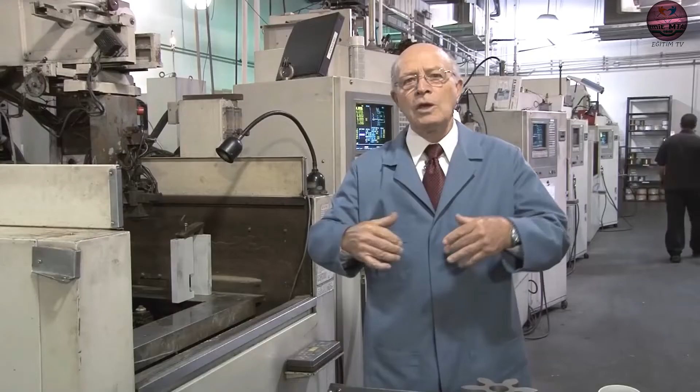Cut all kinds of shapes with Wire-EDM. This is a spool of wire that we use. It's brass, and you can envision this here, wire. It's like a precision bandsaw, and we can cut up to 45 degrees.

Anything that is electrically conductive, even tungsten carbide, Hastelloy, Inconel, all kinds of exotic metals - if it conducts electricity, we can cut it with wire. Wire comes in sizes up to 14 thousandths, but we generally go up to about 4 thousandths, with accuracies up to plus or minus one tenth of a thousandth.

An average hair thickness is 2.5 thousandths. If you can slice that hair 25 times, that's how close we can cut with Wire-EDM.

This is another Wire-EDM machine, and here you can see the wire coming in from the back of the machine. It goes up in these rollers, and it comes down into here, and then it goes through the diamond guide. And here's a part in the machine where we're cutting out the keyway.

There's a keyway in here that was already cut out. This machine, and most of our machines, have an automatic wire feed system. This will automatically cut the wire, and the wire goes back and gets chopped up, and then the machine moves over and automatically rethreads.

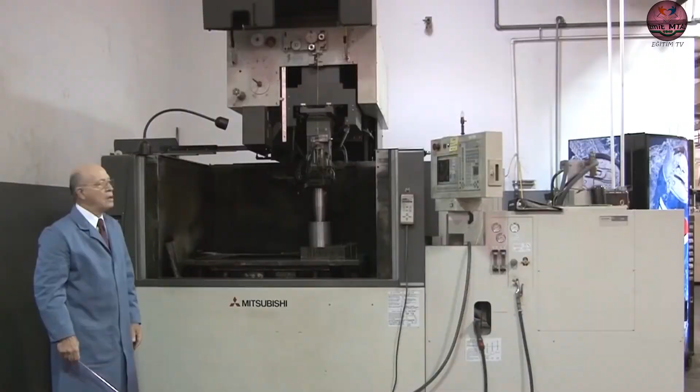This is another one of our EDM machines here, and this is one of our large ones, to give you an idea of the size of it. This machine can cut up to 26 inches submersed. From here to here, it's 26 inches deep, and it's filled with deionized water.

It's submersible. We have a part over here that's for the oil field, and we're cutting a taper in here - it's a circle on the bottom, with a little shape cut out over here, and this is the shaft. I'd like to talk about our showpiece that we have over here.

And this is an eagle, as you can see right over here, and here's Texas. This would be impossible to machine with conventional machining. Just look at the detail on this eagle and the arrows over here, and then the lettering here, reliable EDM. Notice the thin lines that we cut out - remember, Wire-EDM is like a precision bandsaw. Now look at Texas down over here, and there you see the R that we cut out - we left it on there. And then our website, it's all done with Wire-EDM.

I have in my hand a test specimen that we're going to put into this EDM machine to give you an example of how Wire-EDM cuts. You're going to see the sparking taking place. But there's a lot more to this - we're going to go into details in other videos, how Wire-EDM works, and also the amazing capabilities of this system.

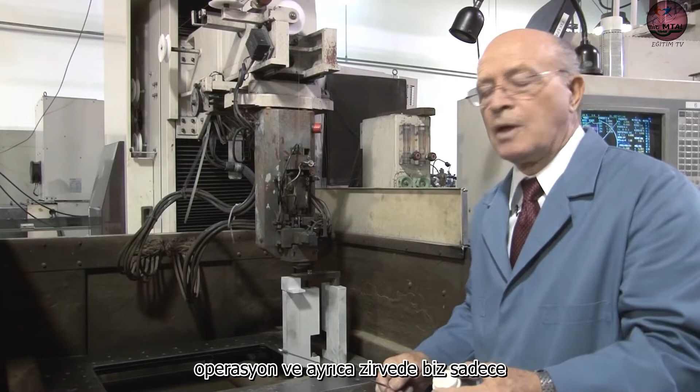Now we have the test piece mounted in the machine over here. But I want to stress, this is not the normal way we do our cutting. I have in my hand a flush cup. Usually what we want is the flush cup riding along the bottom - this makes it a much more efficient operation, and also on the top. We're just doing this so you can see the sparking taking place.

Now we're filling the tank with water. This is the deionized fluid. Later on we'll explain more about how this water works. The wire has to be surrounded by water for it to cut. The water acts like a resistor.

Now we see the spark erosion taking place, and it's cutting. Sparks jump from the wire to the workpiece, and there's always a gap. Later on we'll go into much more detail about what actually happens within that cavity. It is spark erosion - the sparks are eroding the metal particles, and then the filter system removes the eroded particles.

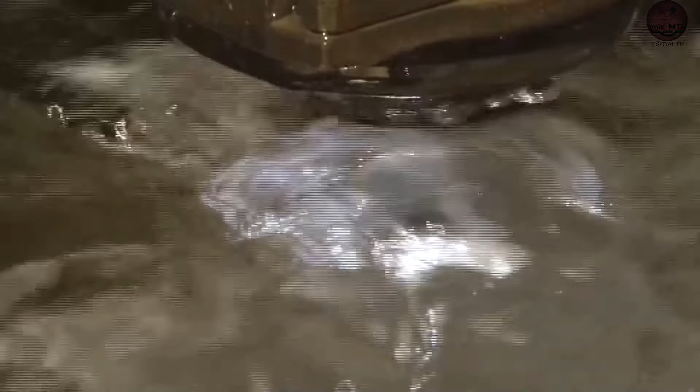Now I'm going to turn the flush on, and this is what we would normally have, but then you can't see the sparking so well. Look at the sparks now, it's cutting into that edge. There you can see the full length of that wire now cutting into that edge.

We just took this test piece out of the machine, and you saw the spark erosion taking place. Now I want you to look at this scene where we're going to be skim cutting this entire piece.

One of the questions is, with the wire, what happens to it? How many times do you use it? We only use the wire one time. At the back of the machine, we chop up the wire into tiny little pieces. We have these choppers that are in the back there, and then we sell it for scrap. This is not gold, this is just brass.

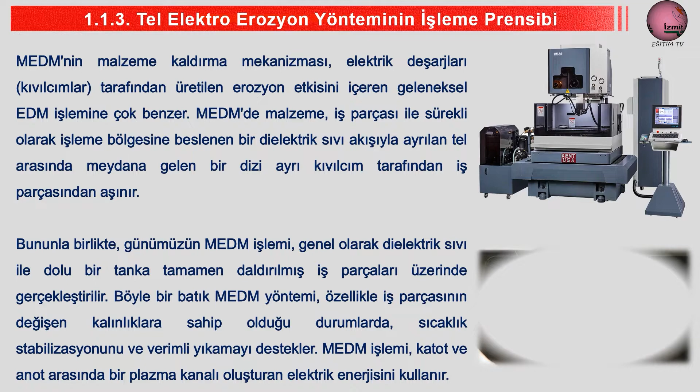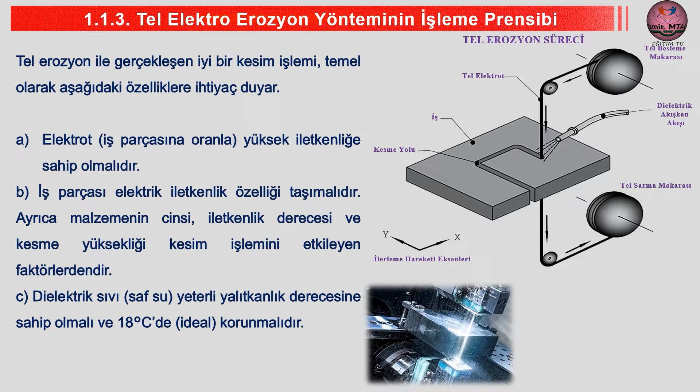C. Dielektrik sıvı yeterli yalıtkanlık derecesine sahip olmalı ve 18 derecede korunmalıdır. D. Ortam sıcaklığı 20 derece ve nem oranı %50 olmalıdır.

Tel Elektro Erozyon tezgâhlarının donanımı. Elektrotermal metal çıkarma işlemi olan tel elektrik deşarj işleme, havacılık, nükleer ve otomotiv endüstrilerinde, işlenmesi zor çeşitli elektriksel iletken malzemelerde hassas, karmaşık ve düzensiz şekilleri işlemek için yaygın olarak kullanılmaktadır.

Elektrotun sürekli hareket eden elektriksel olarak iletken bir tel olduğu geleneksel elektrik deşarj işleme işleminin özel bir şeklidir. Hatalı şekiller üretme eğilimini azaltmak için mekanik bir cihaz kullanılarak gergin tutulur.

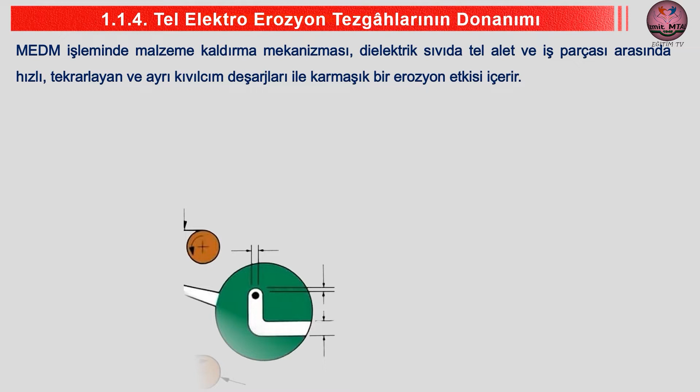İş parçası, dielektrik sıvı, tel çapı, makara, yarık, kıvılcım aralığı. Bu işlemde, malzeme telin önünde aşındığından ve takım ile iş parçası arasında herhangi bir nispi temas olmadığından, malzeme sertliği bu işlemle malzemelerin işlenmesi için sınırlayıcı bir faktör değildir ve ayrıca telde artık gerilme oluşumu da yoktur.

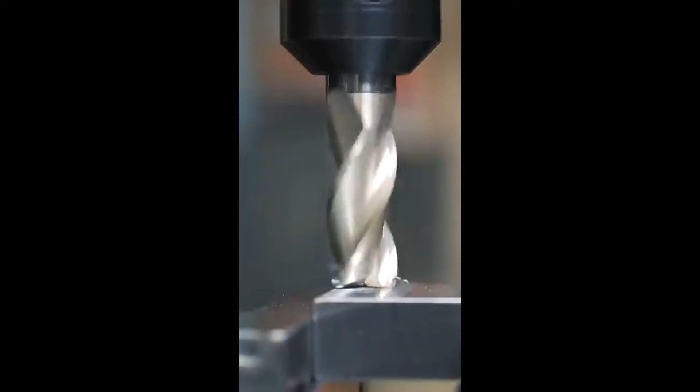Next, we use the mill to square it up and bring it to size. We hand file any sharp edges. Next, we take it to the grinding room.

A magnet holds the steel block on the table while the surface grinding machine is operating. A coolant is applied while grinding. Between grinds, we turn the magnet off and use the hose to wash away any steel particles.

We then use our hole popper to make pilot holes so we can thread the EDM wire. The coolant is deionized water. A brass electrode burns 4 holes for the 4 puzzle pieces and 2 as backup.

Next, we program the machine. Then we load the steel block into the EDM.

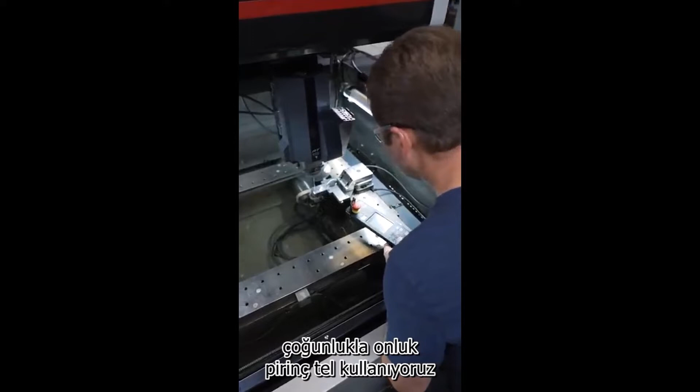We mostly use brass wire that's 10/1000ths of an inch thick. That's about 3 times the size of a human hair. For some projects, we use a wire that's 4/1000ths of an inch thick. The typical tolerance for a project like this is 1/10 of a thousandth of an inch.

We fill the tank with deionized water so the liquid has 0 electrical current. The water is safe to touch, which is why we can put our camera lens underwater. After threading the wire, it creates an electrical arc that burns away any conductive material.

The water flushes the material waste away, and the water is recycled. Despite this, the water gets very dirty within 5 minutes or so, we can't see much after that point.

After one piece comes out, we rethread the wire to cut the next piece, and so on. After about 2 hours of machining, the last piece comes out.

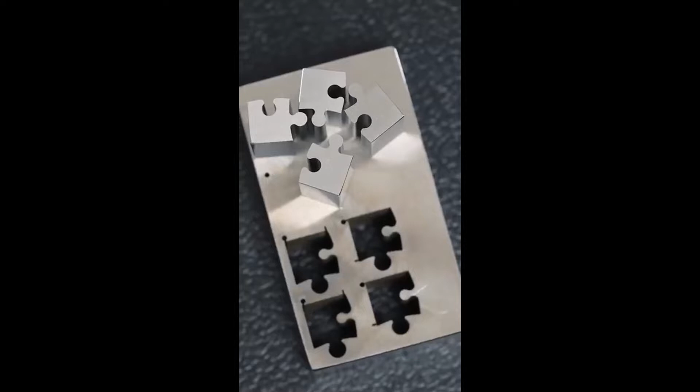We chop up the spent wire to be recycled. We put on the finishing touches using the manual surface grinder. We use this same process to make molds for parts we make in our plastic injection molding machines.

For example, we mold our E4T cover and it needs to be so precise that this lens can be installed perfectly.

Tel Elektro Erozyon yönteminin avantaj ve dezavantajları. İş parçasının sertliği önemli değildir. Titanyum, karbür alaşımları ve sertleştirilmiş çelikler gibi geleneksel yöntemlerle işlenemeyen malzemeler işlenebilir.

İşleme esnasında düşük kuvvetler oluşur. Mikron ölçüsünde hassas kesim yapılabilir. İnce malzemelerde herhangi bir deformasyon ortaya çıkmaz. Az miktarda çapak oluşur.

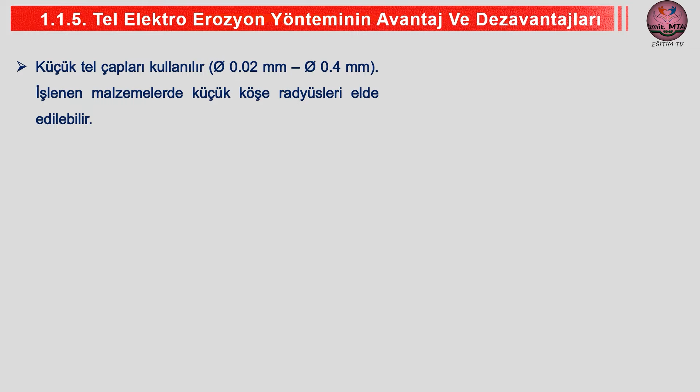Küçük tel çapları kullanılır. İşlenen malzemelerde küçük köşe radyüsleri elde edilebilir. Ortaya çıkan talaş ebatları 10 mikron civarında olduğundan talaş atımı problemi azdır. Dielektrik sıvısı olarak su kullanıldığından kıvılcım oluşumundan ortaya çıkabilecek yangın tehlikesi engellenir.

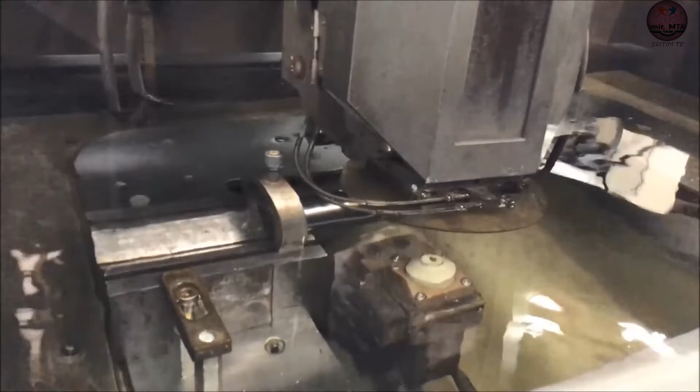Not going to start sparking it. You got to turn it on. No.

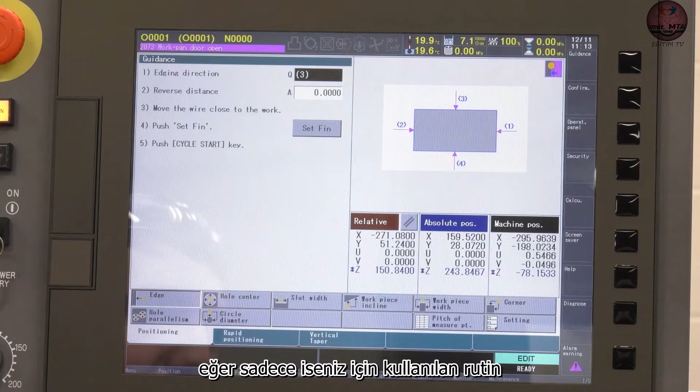With this screen, what have we got here? So this is a basic edge finding routine, used if you're just finding a single edge on the part. It's got edging direction, which way you want to go, and a reverse distance if you need that. It's all touch screen.

Rough positioning speed - that's how fast you rotate. That rough positioning is for more accurate holes when you've really got to tie up to microns. And then you've got the other option of rapid, which travels a lot faster when accuracy isn't quite as important.

Then the others: threading the wire, setting the finish and cycle start. So it's almost like a canned cycle there, it's talked through.

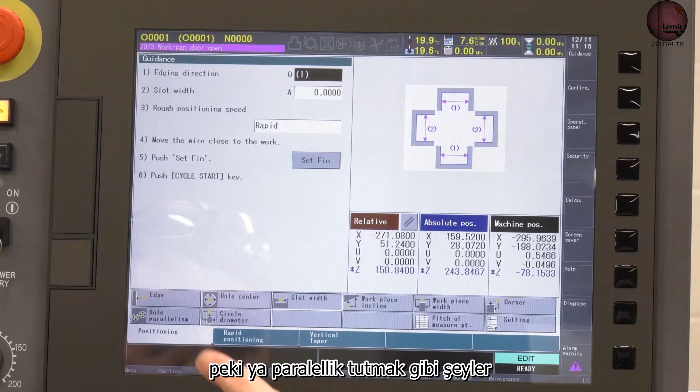Let's skip forward here. What about things like hole parallelism? That's for finding - if you've got 2 holes in a workpiece for alignment, you can find one, centre find on that, find the other, centre find on that, and use that to rotate the axes around.

And then circle diameter? If you've got to find the external of a circle, if you're working on the outside, use that.

And one of the things you mentioned to me is the graphical side of this, and how that assists you. Is there anything you can show us here? So this is the graphics for a program, just to cut out some soft jaws for one of the jobs we've got on milling. This displays the graphics there.

And what does that do? That fills you with confidence that what you've programmed is right? Yes, it does. It makes life a lot easier when you want to say, hang on, it's not doing what I want it to do. And it will tell you where in the program, with certain things, if it's wrong.

What about the diagnostic side of the machine, making sure that everything is working how it should? It's got a very user-friendly maintenance page which tells you the service life of all the items in there, and you've got your regular services, which covers all the other parts of the machine, like your die guides and other parts. Does this go beyond this as well?

It's got the filter life as well, so this is a very low hours machine. And you see consumable life and stuff like that. Do you use those features? Yes, we do. They're very useful and accurate with how long parts will last.

Okay, and then what's auto wire feed diagnose? That's telling us where, if we're having a wire break, where it's breaking, which is very useful if you're thinking - why is that useful? If you've got a wire break at a certain point in the program, it tells you if it's breaking on the material, if there's a hard spot on it, for example.

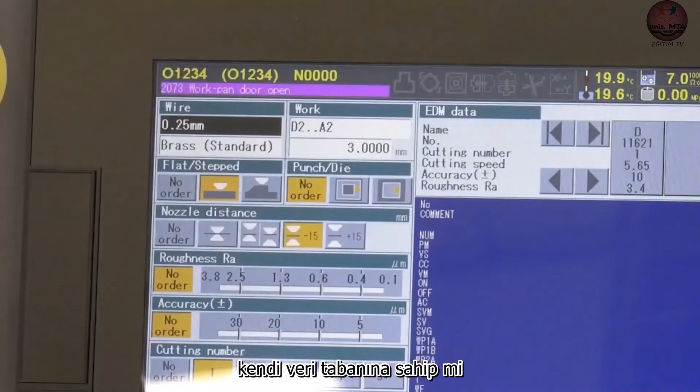Now I notice here at the top you've got wire, 0.25 and brass. Does it have its own database of materials and dimensions? Yeah, it does, it's got many options. This machine will cut from 0.1 to 0.3 wire. It tells it whether you're using hard or soft brass, and it works out all the feeds and speeds, the appropriate machining or cutting data.

Yes, it does. So taking all this into account, I know we've had a very quick demonstration, but how easy has all this been to pick up? How much easier does it make your life here when you're programming and operating these machines? And how reassured are you, as a result, that you're not going to make mistakes?

Oh, I find it very easy, and it's been very easy to pick up. Coming into wire EDM from a milling background, it's helped a lot when you're not quite sure of exactly what you're doing when you're first starting.

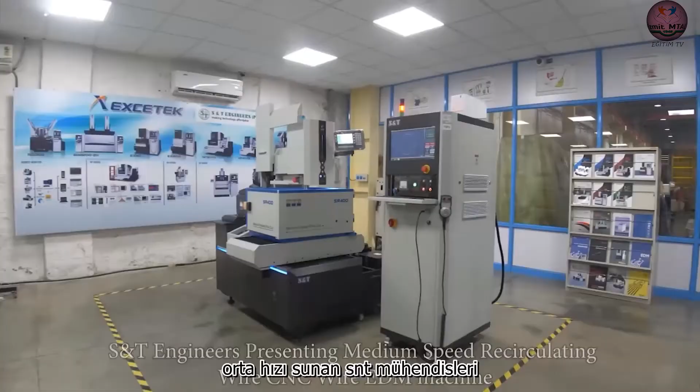S&T Engineers presenting a medium-speed recirculating wire CNC wire EDM machine.

Electrifying change is hitting the EDM market thanks to the new Mitsubishi MV Series wire EDM machines. With game-changing, all-encompassing engineering improvements, many of which are industry firsts, these machines deliver productivity and performance like never before. At Mitsubishi, we are always looking to improve, always finding within ourselves ways to compare and make things better than our previous generation. So with the new MV series, we looked at items from the previous generation to see what we could improve for our customers.

The machine construction itself offers significant improvements. On the MV series, with the T-casting, you have both the X and Y axes mounted directly to a set of ways on that base casting. The table moves right and left on that set of ways, while the column moves in and out on the Y-axis on a separate set of ways. This style of direct axis mounting removes the squareness and repeatability issues that come with a stacked table design, providing higher rigidity and smoother movement for more reliable and precise cutting.

The MV1200 machines are also twice as heavy as previous models, and offer a hardened stainless steel table and larger travel size without a significant increase in machine footprint, for larger submerged cutting capabilities.

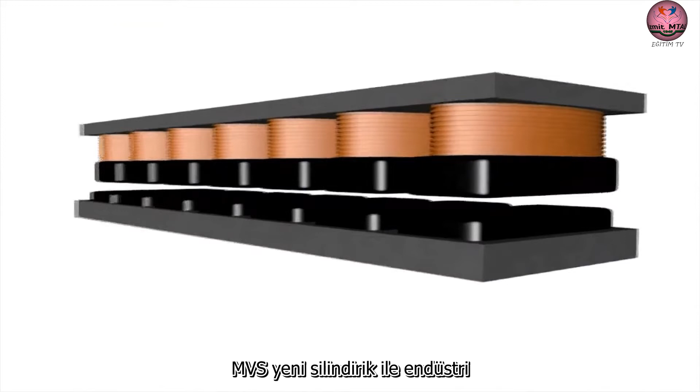Mitsubishi EDM revolutionizes the industry with the MV's new cylindrical drive technology. The round magnetic shaft of the linear shaft motor creates a 360-degree magnetic flux for a revolutionary no-contact design.

One of the negatives on a flat plate system is the magnets are rather large. It takes special construction in the machine casting to mount this. With a linear shaft design, we've taken those permanent magnets and turned them into little buttons, lined up end to end inside a stainless steel tube. So now we've got a shaft that basically replaces the ball screw, and when you put energy through it, it pulls itself along from magnetic field to magnetic field.

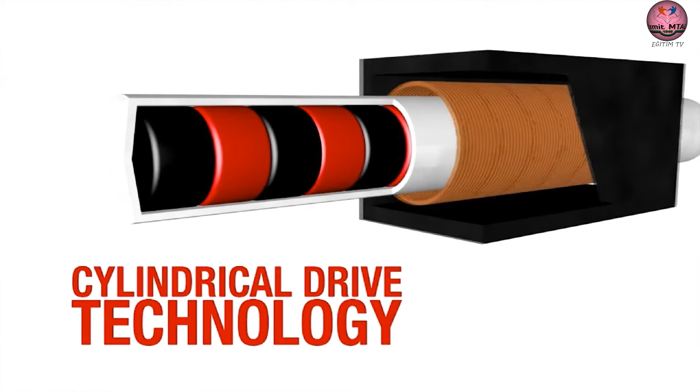The new design prevents issues associated with traditional linear drive systems, which trap heat behind the iron back plate on the magnetic mount and are susceptible to metallic shop dust interference. Other advantages of the cylindrical drive motor include higher speed precision, no lubrication or adjustment, simple setup, reduced noise, no cogging, and the ability to use commercially available servo drivers. By eliminating ball screws, we eliminate wear, backlash, and pitch error compensation, and thus the need for eventual replacement and the downtime it creates.

The new MV servo control system uses a fiber optic optical drive system with 4 times the communication speed for improved reaction time and accuracy. The Advanced Plus uses an optical drive system, so instead of hard wires running through everything, it's all running on fiber optics.

The digital matrix sensor and V350 Type 5 generator specifically shapes the pulse to minimize electrode wear and decrease wire vibration. With the digitally shaped spark and the speed of the control, they've been able to reduce electrode wear on the wire, allowing the wire speed to be slowed down. We've seen as much as a 60% reduction in electrode wear, meaning a 60% reduction in wire cost to cut a part, with no degradation in part accuracy or surface finish.

This, combined with a substantial decrease in power consumption, can lead to a more than 40% reduction in overall operating costs. A new auto threader design delivers improved threading capabilities.

Upper rollers now travel with the Z-axis, creating a constant distance to the upper guide. This allows for nearly 14 inches of annealed wire length, reducing the wire curl ratio to 10% or less, improving threading reliability on tall parts. The insertion method can be set to match the workpiece shape, and operators can now thread without the jet stream on, to get closer to the workpiece or machine smaller parts.

Finally, a new head design features a flat plate power feeder, making it easier to index during operations. Without the need to open doors or rotate the carbide or rethread wire, shops can realize significant time savings. On the previous version machine, it would probably take about 10 minutes to index power feeders. Here you can do it in about a minute per head.

The MV series is not just a linear machine, it also provides lower operating costs, reduction in cycle times, and up to a 30% finer finish than previous models.

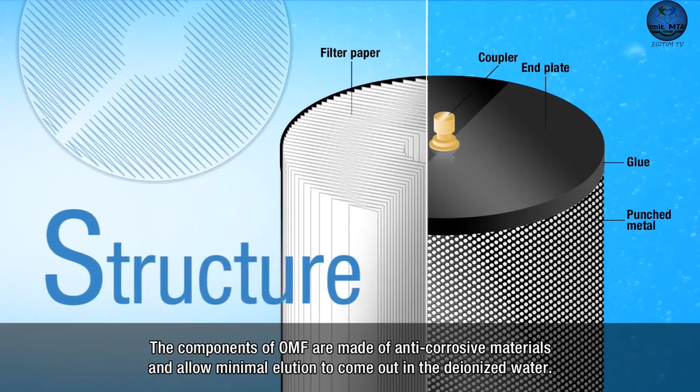Optimum internal filter design.

The OMF series has two distinguishing features. The first is ultra-high efficiency. Thanks to the OMF series' special fine filter paper, you can get clean water immediately after starting processing.

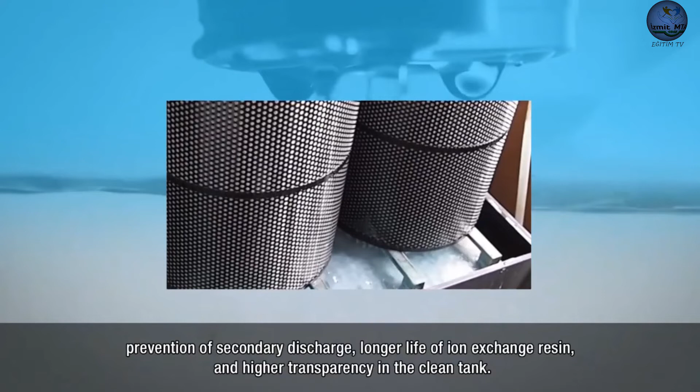Furthermore, in wire electrical discharge machining operations, OMF's ultra-high efficiency provides improved surface roughness of fabricating materials, prevention of secondary discharge, longer life of ion exchange resin, and higher transparency in the clean tank.

As you can see, with other conventional filters with coarse mesh, metal chips easily choke the filter and flow outside of it. But the OMF series is made of a special fine filter paper, which catches metal chips on the surface of the filter, making it hard for metal chips to enter inside the paper and cause blockage or clogging.

When you compare the used filter papers of the OMF with conventional products, it's plain to see how much cleaner the OMF series is. Since you can always get a clean filtrate, highly accurate electrical discharge machining is possible.

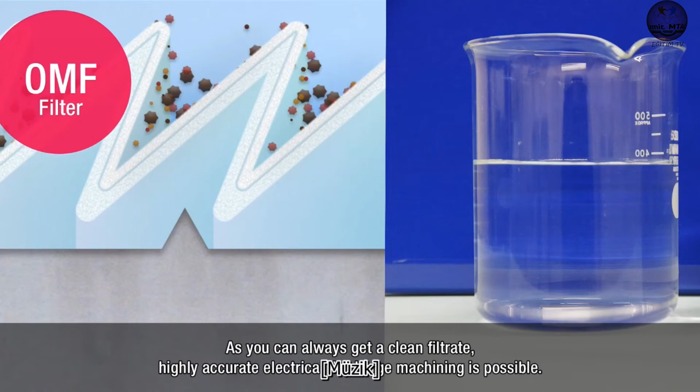The second feature of the OMF series is longer life. The OMF series has longer life due to a unique pleating structure and surface filtration mechanism that brings clean water for wire electrical discharge machining. This means that by using the OMF series, running cost can be reduced.

Our test results show the OMF has about a 30% longer life compared with conventional filters. The OMF series comes in a wide variety of filter types, providing suitable filtering solutions for various wire electrical discharge machines.

Tel Toplama Ünitesi. Makinenin bu kısmında kesim yapmış olan hurda tel malzeme otomatik çekici vasıtası ile toplanır. Tel Erozyon makinelerinde tel malzeme kesim esnasında deformasyona uğrayıp özelliğini yitirir. Bu nedenle bir defa kullanıldıktan sonra hurda olarak toplanır.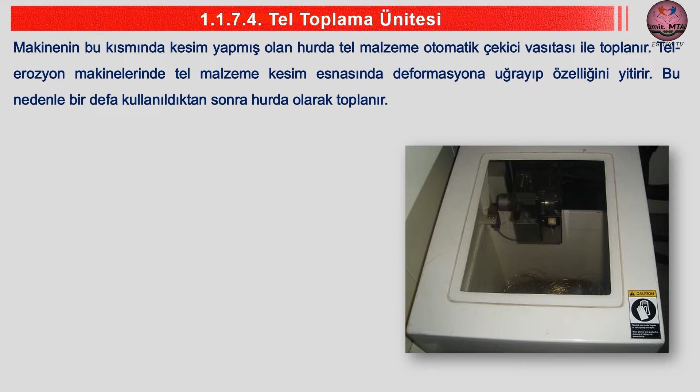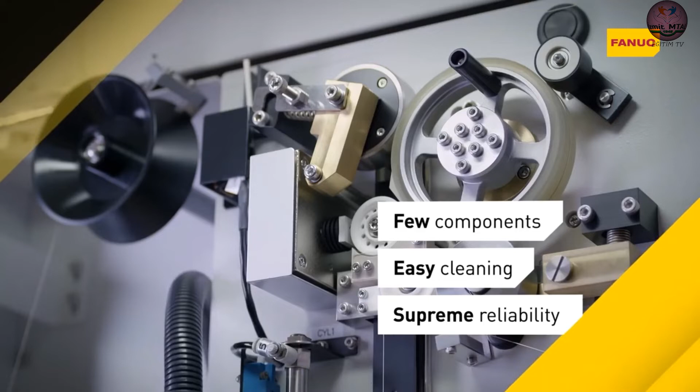For reduced cycle times and continuous unmanned production, RoboCut is equipped with cutting-edge wire feed technology. Fanuc's unique AWF2 automatic wire feed technology provides fast, reliable automatic wire feed in just 10 seconds. Wires are cut electrically, leaving a pointed end that is absolutely straight and burr-free, even on soft wire. Aided by a jet of water, wire feeding is foolproof and very fast. For easy maintenance and maximum reliability, the feeding mechanism comprises minimal components.

Regülatör ünitesi ve hava filtresi. Kesim esnasında üzerinde bulunan basınç ayar valfi ile hava basıncını düzenleyerek hava basıncını kontrol altında tutar. Hava filtresi tozları tutarak soğutmanın istenen seviyelerde tutulmasına yardımcı olur.

Hidrolik güç ünitesi ve soğutucu ünite. Makine tabla ve kafa hareketlerinin tahrik edildiği kısımdır. Soğutma ünitesi sürekli dolaşım yapan hidrolik akışkanı soğutur.

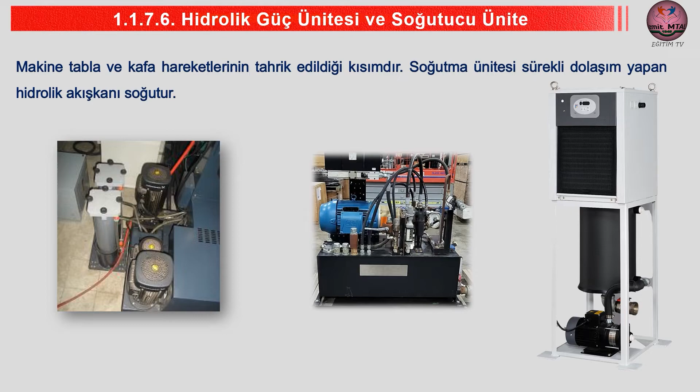Deşarj. Deşarj için gerekli durumlar. İş parçasının elektrik iletkenliği olmalıdır. Deşarj sıvı içinde oluşmalıdır. Deşarj ardışık olarak oluşturulmalıdır. Uygulanan voltaj, on-time, akım ve off-time kontrol edilmelidir. İş parçası ve elektrot arasındaki aralık kontrol edilmelidir.

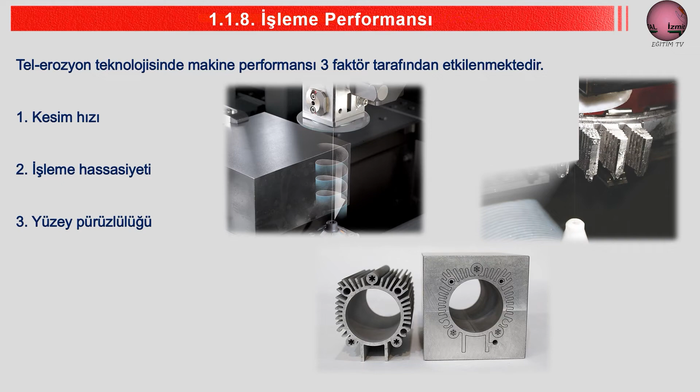Kesim hızı. Kesim hızı arttıkça kılavuzlardan başlayarak iş parçasının ortasına doğru artan bir şişme meydana gelmeye başlar. Çoklu kesim yapılsa dahi oluşan şişme engellenemez. Bunun sebepleri: tel, oluşan ilk şekle uyar. Ark, teli malzemeden itmeye çalışır. Bu nedenlerle yüksek kesim hızı ve kesim hassasiyetini aynı anda elde etmek mümkün değildir. Optimum kesim hızı hassasiyet ilişkisini tayin ederek en uygun değerleri seçiniz.

Kesim hızı limiti, yüksek kesim hızına ulaşmak için yüksek deşarj gücü tekrarlanmalıdır. Kesim hızı eşittir deşarj başına düşen akım çarpı tekrar miktarı, o da eşittir kesim akımı. Eğer yüksek kesim akımı verilirse kesim hızı artar. Ancak yüksek kesim akımı tel elektrodun ısınmasına neden olur ve bunun neticesinde telin çekme dayanımı azalır. Tel sürekli gerilim altında olduğundan ilerlemesi doğrusaldır. Isı neticesinde telin çekme dayanımı tel geriliminin altına düştüğünde tel kopar.

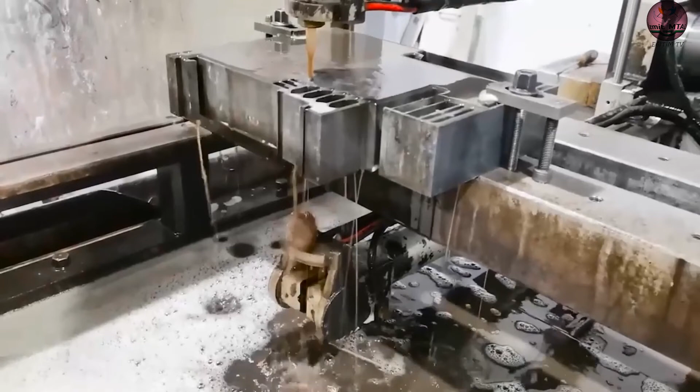Tel Elektrot. Üretimde kullanılan tellerin değişik türleri ve çeşitli üreticileri vardır. Tel Elektrot geleneksel işlemedeki kesici takım olarak düşünülebilir. Uygun kesim yapabilmek için uygun tel elektrot seçimi önemlidir. Deşarj esnasında iş parçasının yanı sıra tel elektrotta da aşınma oluşur ve tel çapı azalır. Tel sürekli akış halinde olduğundan çapı küçülmesine rağmen kopmadan ilerleyebilir.

Tel elektrot malzemesinde bulunması gereken özellikler şunlardır: Düşük elektrik dayanımına sahip olmalıdır. Kolay deşarj oluşturmalıdır. Yüksek sıcaklıkta yüksek çekme dayanımına sahip olmalıdır. Uygun bir fiyatı olmalıdır.

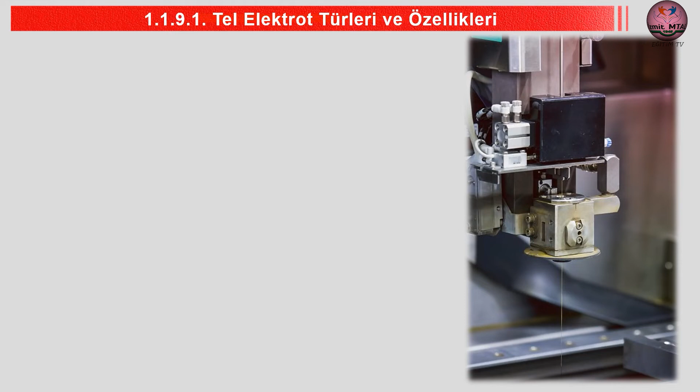Tel elektrot türleri ve özellikleri. Pirinç tel, %65 ile 70 bakır ve %35 ile 30 çinkodan yapılır. Deşarj performansı ve çekme dayanımı oldukça iyi ve düşük fiyatlıdır. En yaygın olarak kullanılan elektrot türüdür.

Alaşımlı pirinç tel, genellikle Ti, Al, Fe, Cr gibi malzemelerin alaşımlanmasıyla elde edilir. Yüksek sıcaklıkta yüksek çekme dayanımı vardır ve yüksek hızda işleme için kullanılır. Aynı zamanda alaşım malzemesi olarak bakır da kullanılmaktadır. Bu tür teller kaba işlemeler için uygundur ancak fiyatları oldukça yüksektir. Aynı zamanda otomatik tel geçirmedeki başarı oranları da bir miktar düşüktür.

Birleştirilmiş tel, telin iç kısmına çekme dayanımını artırmak için yüksek çekme gerilimine sahip bir malzeme, dış kısmına ise deşarj özelliği iyi olan bir malzemenin birleştirilmesiyle elde edilir. Yüksek tansiyonun yanı sıra yüksek kesim hassasiyetinin istendiği özel uygulamalarda kullanılır. Fiyatı yüksek, otomatik tel geçirmedeki başarısı düşüktür.

Özel tel, molibden ve tungsten teller yukarıdaki malzemelerden 2 ile 3 kat daha fazla çekme dayanımına sahiptir. Bu tür teller köşe radyüslerinin 0,05 mm'nin altında olduğu uygulamalarda kullanılır. Elektrik dayanımları ve kesim hızları düşüktür ancak oldukça pahalıdır.

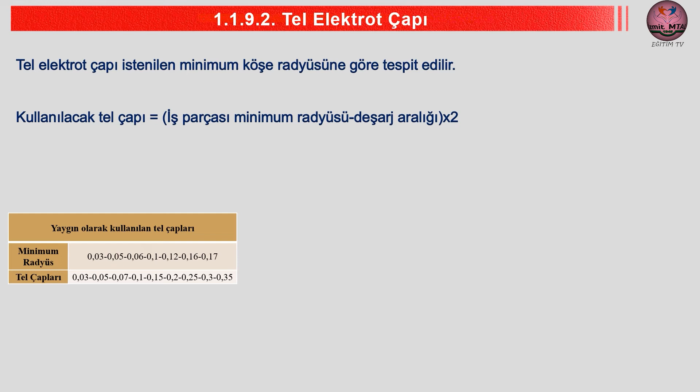Tel Elektrot Çapı. Tel Elektrot Çapı istenilen minimum köşe radyüsüne göre tespit edilir. Kullanılacak tel çapı eşittir iş parçası minimum radyüsü deşarj aralığı çarpı 2. Deşarj aralığı birinci kesimde 50 mikron, diğer kesimlerde 10 mikron civarındadır.

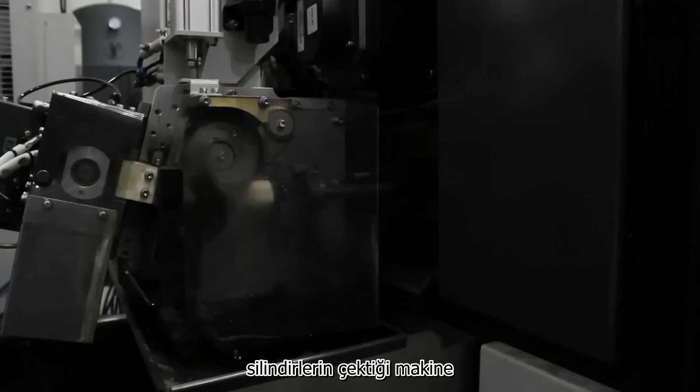We're now going to look at the machine more closely and see the path the wire takes. So the wire travels from the spool through a series of rollers to control speed and tension, into the upper head where we have diamond guides, through the workpiece, into the lower head where there are also diamond guides, past the power feeders, and then the wire travels to the back of the machine where the rollers pull the wire through. Finally, through a chopper unit where the wire is cut into small pieces for disposal.

All our machines have auto thread functions. This enables the machine to move the head to the correct position and then to self-thread through a start hole in the part automatically. The machine will then fill the tank with dielectric fluid. In this case, it's deionized water.

And then it will start machining. At the end of the cut path, the machine will cut the wire and move to the next position, rethread, and then start machining again. If required, this enables us to put several parts in the machine and for it to run unattended.

Now I'll show you the machine cutting a test piece. We've set this up in a non-standard way so that you're able to see the sparking taking place. Normally we would get the upper and the lower heads, the guides and the flushing cups closer together, which is better for both speed and accuracy. We're setting up this way just so that you can see the machining.